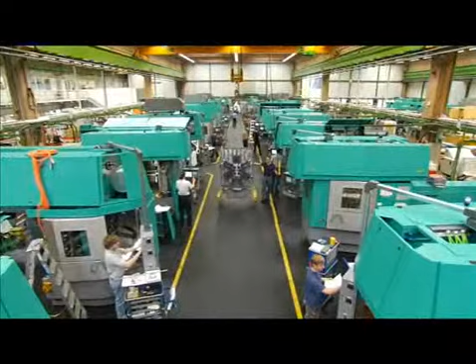The Index production facilities are one of the leading manufacturers of CNC lathes worldwide, headquartered in Esslingen. The Index Group is a player in the international market because of its production sites and sales offices in Europe and Asia, as well as in North and South America.

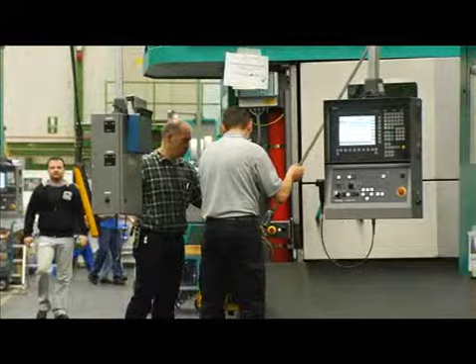The specialty of this worldwide acting, long-established company, which was founded in 1914 and currently employs more than 2,300 people, are multifunctional production centers.

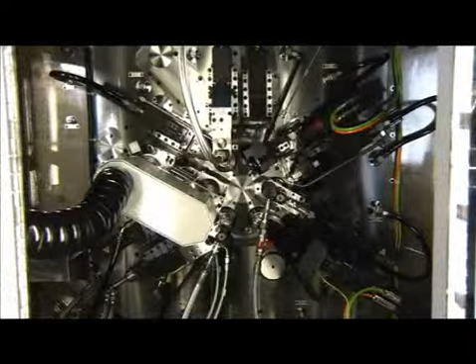Technical innovation is part of the Esslingen company tradition because Index works in a market segment of very complex products and has a pole position on the market because of its innovations.

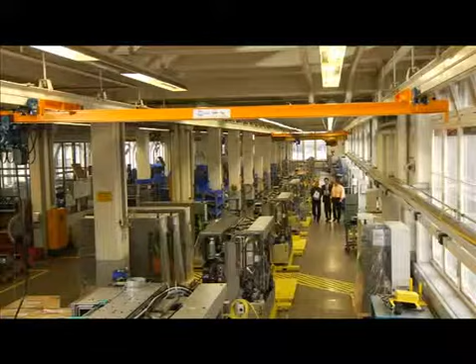The Index Control Engineering Director, Mr. Eberhard Beck, totally trusts in his strong partner, Siemens, when it comes to this task. Siemens is leading in technique and technology for controls, just as we are leading in technology for machine tools. We need a strong partner who is able to implement our ideas concerning mechanical engineering and control applications.

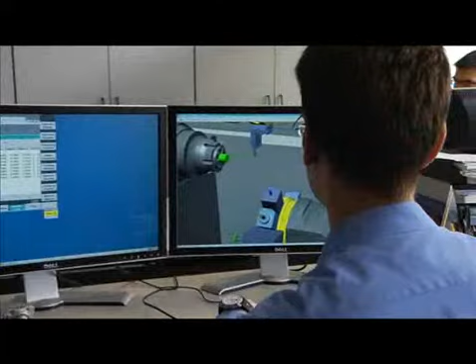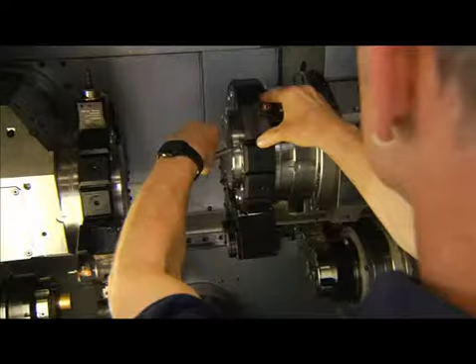The virtual machine software is an example of partner-like cooperation. For complex machining operations, it can take a whole day or 1.5 days to program and set up a machine tool for a new workpiece in order to start a test run. During this period, the machine tool is blocked, which has a negative effect on the overall operating efficiency of the machine.

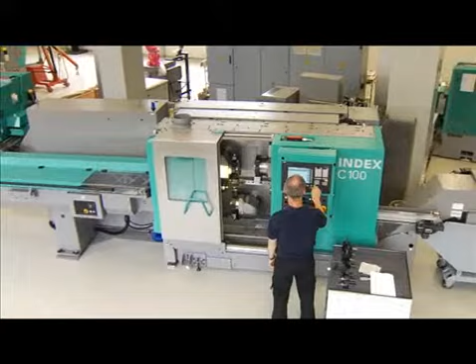The main idea regarding the virtual machine was to install a one-to-one copy of the machine tool on a personal computer and make it available as a tool to the machine operator.

The main particularity is the fact that the complex functions of the control are imaged at 100%. Compared to former systems where it was tried to copy the control, we now have 100% coverage of the functions. That means the customer can be sure that the simulation acts like his real machine tool.

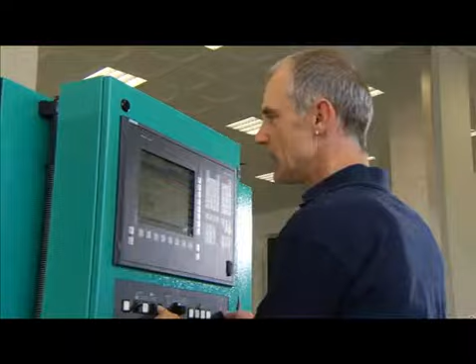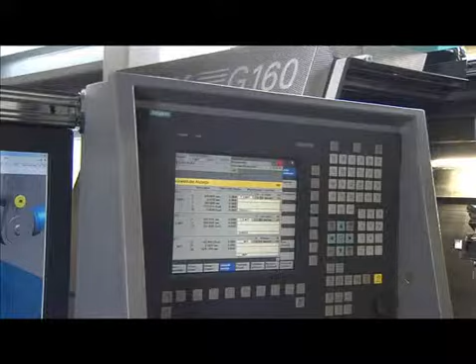The machine operator has exactly his two views, namely the display view of the control and the view onto the working area, which he knows, and he operates the simulation in exactly the same way as his machine tool. That means no rethinking and no training would be necessary.

The end user can save a lot of time on the real machine tool, especially with regard to setup times. In the past, we've spent a lot of time troubleshooting on the machine. Today, we can spend this time at the office simultaneously with the production process, which of course allows longer machine tool run times and reduces downtimes.

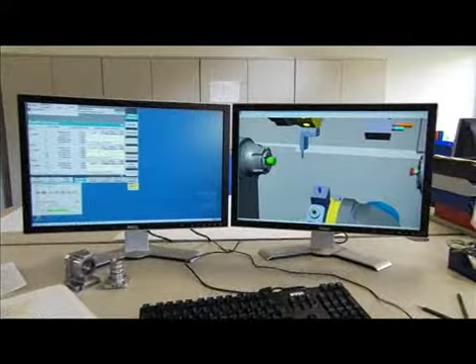However, the virtual machine offers some further advantages. Not only the hard facts are important - for example, the setup time upon the order change to new products is reduced by 80 to 90%. The soft facts must also be considered.

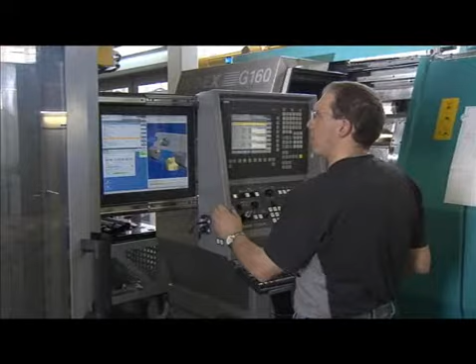The machine operator can now approach an Index machine tool in a safer way. He can learn how to handle it by using the virtual machine. He can test it and run his new programs without requiring a real machine tool. It goes without saying that in this case, he doesn't run the risk of causing a collision, which might possibly cause major damage.

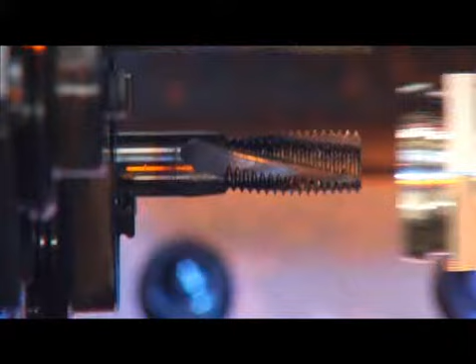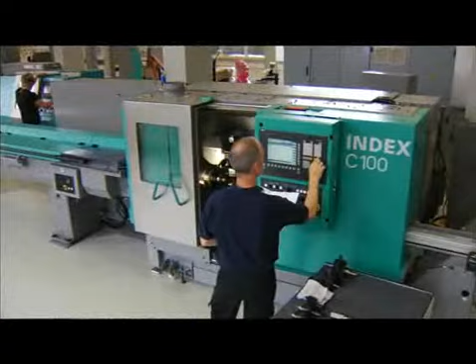The virtual machine has been designed by three strong partners who have contributed their core competence: Siemens with control engineering as its core competence, Siemens PLM with 3D simulation as its core competence, and Index with machine operation and tool geometry as its core competences.

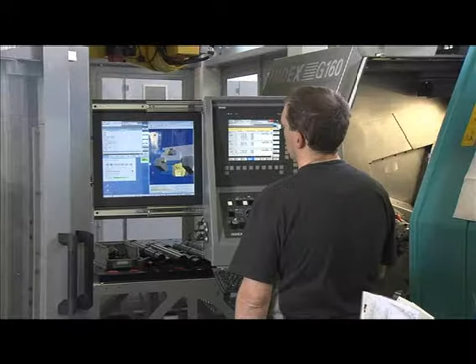Index and Siemens managed to create an absolutely new simulation product which hasn't been available on the market in this form. And in this respect, we do not only see the market leadership in the field of turning milling centers, but we also see a market leadership regarding simulation applications.

The virtual machine was just the beginning. In cooperation with Siemens and Siemens PLM, we will continue to optimize the process chain from engineering through to production, so that we will be able to produce even more economically in the future.